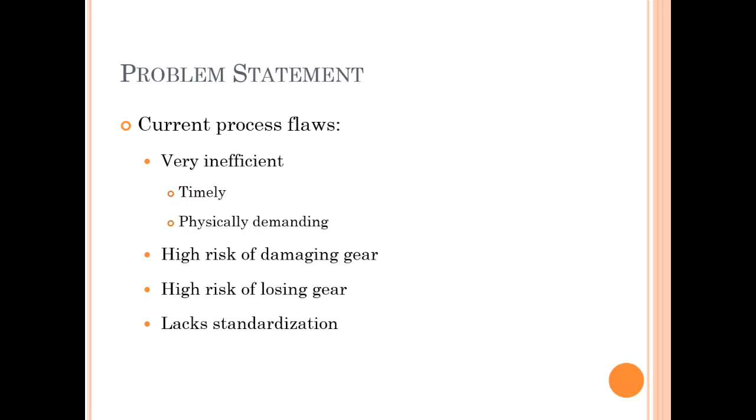It is our aim to address these issues and provide solutions as a result of this project. The current process is as follows.

First, members break down their individual gear. At this point in the process, it becomes a free-for-all, with members loading in gear at will. This often results in confusion and is the step that leaves the most potential for equipment being misplaced or forgotten. Generally, larger items go in first, followed by the miscellaneous and smaller items, but there is no real specified location for different items and where they should go.

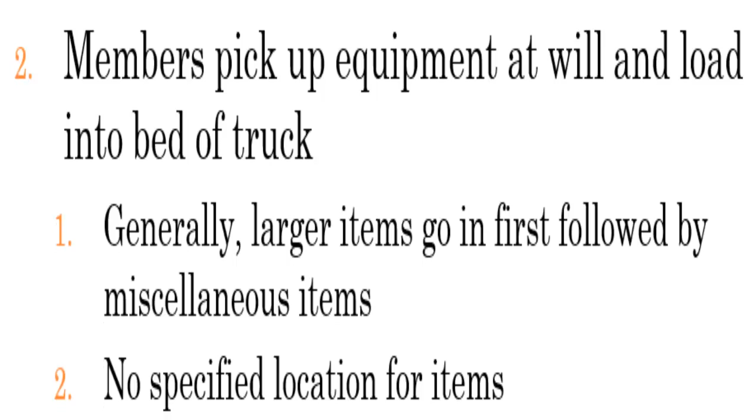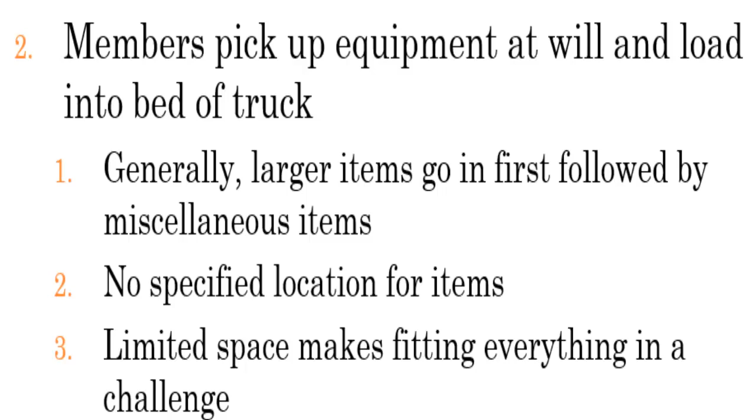The limited space in the bed of the truck often results in not being able to fit all of the gear in, which leads to a game of Tetris, moving gear around until it all fits. The process is an example of LIFO, in which if something in the back needs to be accessed, everything else in its path must first be removed.

Our technical approach is as follows. First, input from the members was translated into design parameters using a House of Quality table. Then, research was done in order to uncover existing products and common practices. Next, the equipment was categorized in order to prioritize which items require an allocated space in the storage unit versus which items are safe and well protected as is and are not likely to be overlooked.

In general, these are items such as amps and instruments, which already have cases, are large, and will most likely not be forgotten. Finally, we will implement our product and process and perform extensive analysis as to its effectiveness in improving the process and its financial impacts.

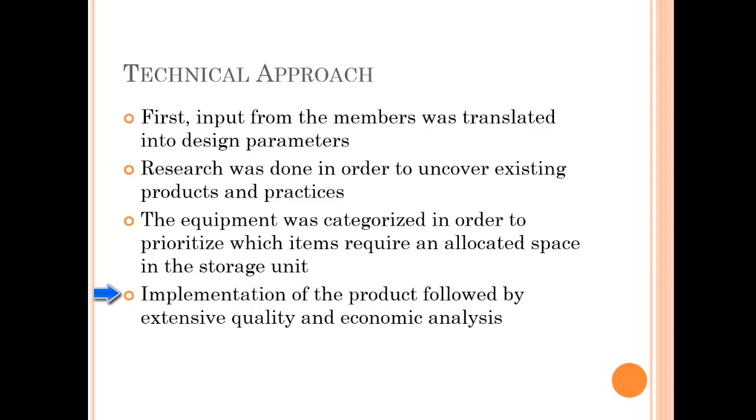Pictured below is our design for the portable storage unit. Originally, the thought was that we would design one single enclosure to hold all of the band's gear. On second thought, and after verifying with the band, we realized that such a large and heavy unit would simply not be practical. Instead, we decided to focus on designing a storage unit to hold the miscellaneous items that are often getting lost or are easily damaged.

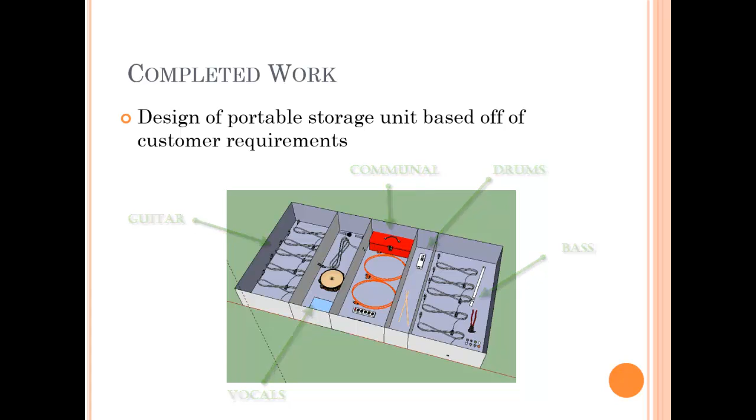As can be seen from the picture, this often entailed various cables. Each section is designated to a different instrument, including the middle section for communal appliances. The size of each section was determined by the space required for the particular gear, and the ordering by attempting to space out the sections with the most items in them, to avoid clustering and to create an evenly balanced unit. Not pictured are the labels for what goes where, as well as the checklist, which will be used to hold one another accountable for missing items.